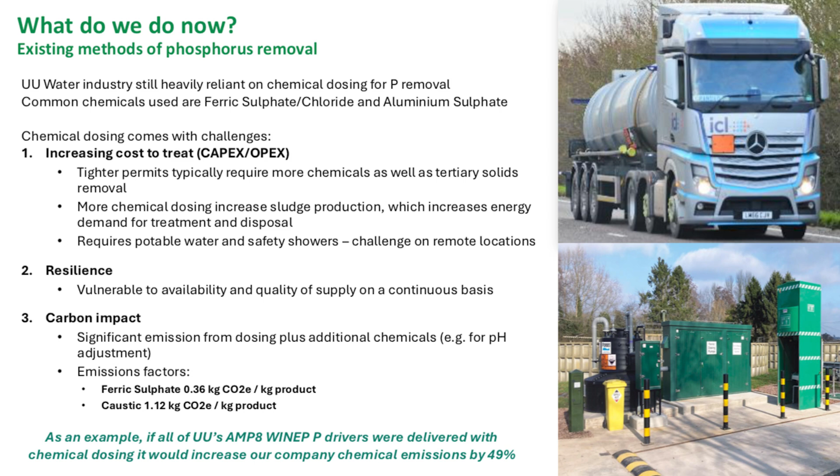As an example, if AMP8 WINEP drivers were all delivered using conventional chemical dosing, it would result in an emissions increase of 49%, so a very significant additional carbon impact just from doing the same thing and trying to scale it up, even if that was possible.

I've talked about rural sites and why they present a challenge, many and varied. In your company and your area of the UK, the challenges will be unique to you, but there are some common themes.

Smaller sites have a much higher cost per capita. The technology and the underlying safety investment and logistics are the same, whether it's a very large site or a very small site. So the overheads and cost of doing things become progressively more expensive the smaller the site you're at.

The operational complexity is a magnitude different to the complexity of the treatment processes already there. I've already mentioned that chemical supplies, electricity supplies, and the operational knowledge to operate some of these complex phosphate removal plants do not currently exist at some of these rural sites.

So increasing staff capability and increasing the critical mass of staff who have the understanding and skills to operate these kinds of plants is going to be a challenge for us, as well as delivering the assets themselves.

The supply chain and logistics I've already touched on. Longer transportation distances, up single track roads, in some cases without the capability to support HGVs, is going to be a challenge, particularly in some of those more remote rural areas. And the effect on communities, whether it's increased noise from deliveries and tankers moving in and out because of additional sludge being created, can be especially impactful in rural locations, including national parks and areas of outstanding natural beauty.

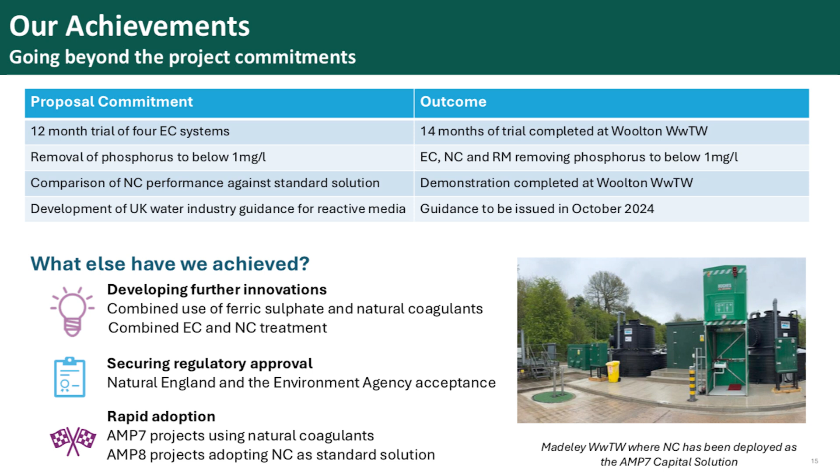That's meant we've been able to use it on a couple of AMP7 schemes already, and it is part of our solutions here at UU for AMP8. So it's really looking at scalability, starting to move what we've learned in the Alt P programme out into the wider business and using it. That's everything from me.

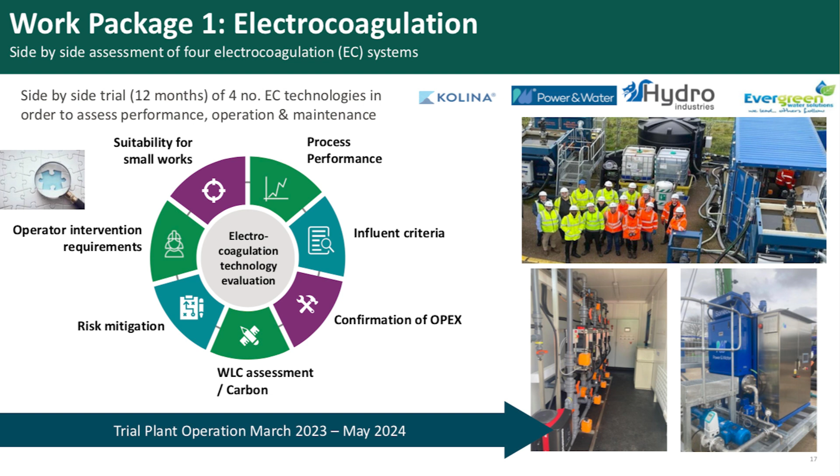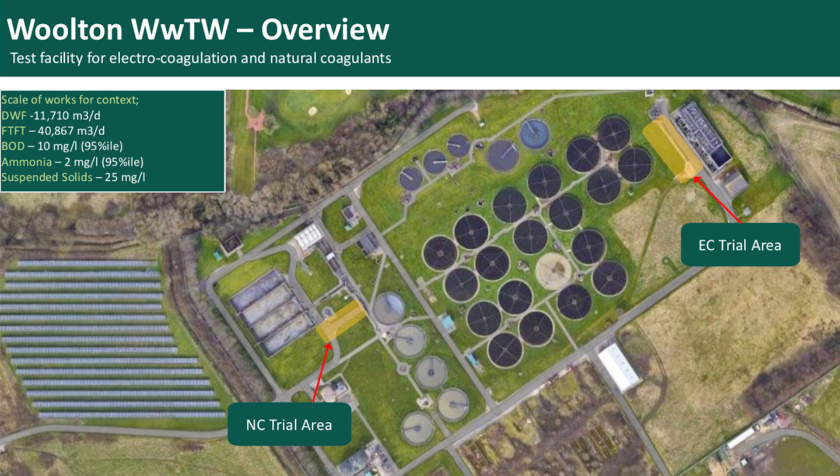So we trialled it down at Woolton Wastewater Treatment Works, one of our wastewater treatment sites based in Liverpool, so Liverpool South. It's a conventional trickling filter site. There's no existing P permit there, so no existing ferric dosing, which meant we had some P to try and remove. We actually hosted both of our work packages on the same site, so you can see the natural coagulant trial area and the electrocoagulation trial area are both depicted on this graph. Just some photos and a timeline.

So we actually started the design and procurement process back in May 22, so it's been quite a long piece of work in terms of a trial. You can see from left to right the progression of where we started to where we ended up. The digger on site was back in January 23 when we started turning the area of site into our semi-permanent trial area.

The photo in the top centre is what we ended up with. We started operating that back in April 23. In the trial area, we've got 4 electrocoagulation suppliers and a ferric control lane as well.

We opted to go for a settlement lamella downstream of every single lane. It's not necessarily the conventional approach we would take, but it normalised everything for us so that everybody had the exact same approach to settlement. We can talk a bit around some of the limitations associated with that and why the results might look the way they do. We ran that all the way through to May this year, when we finished on site - so quite a long trial period, around 14 months.

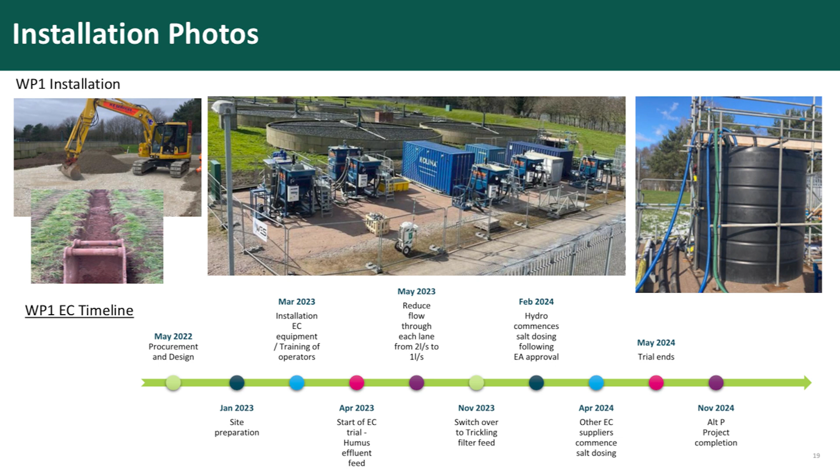We tested a number of different feed sources. We started with humus tank effluent on the advice of our EC suppliers, that being the cleanest, the least fouled, so potentially the most efficient in terms of power consumption. Then we gradually moved it further upstream, so we ended up going for direct lift to the trickling filters, then humus tank feed. We also did an experiment where we artificially raised the conductivity by doing some salt dosing, and I can talk about the impact that had on overall efficiency as we go through the graphs.

There are a lot of graphs, I should warn you now - a lot of graphs, a lot of data, and I'm going to have to go through this pretty quickly. The next one looks a bit messy, so I'll do my best.

This is our instrument data coming off the back of every single lane. We had Phosphax instrumentation on the back of each of our 4 EC lanes and our control lane. I'm not going to go through all of this data point by point, but I think it tells a story.

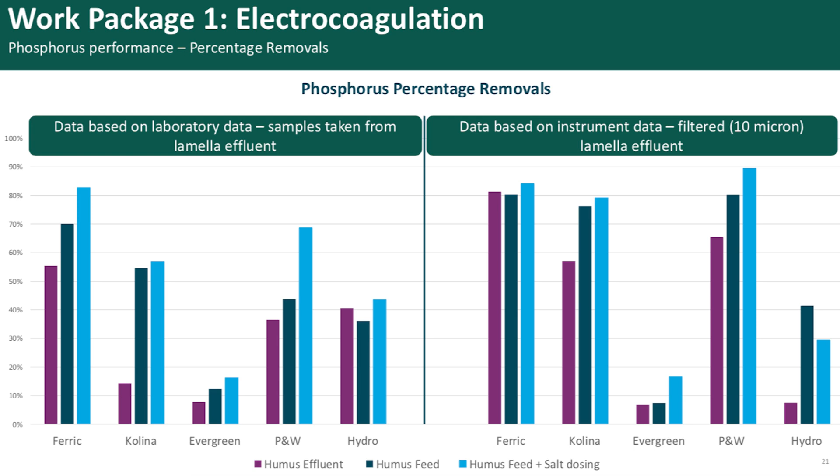That was consistent with some of the solids performance data that we saw as well. For some reason, the solids didn't seem to settle as well in the electrocoagulation lane as they did in our ferric dose lane. I'm not sure if it's just down to the floc formation or whether there's something to do with it.

So you get hydrogen gas generation, which I'll come on to later in the slides, whether the hydrogen gas generation has something to do with floating smaller solids rather than allowing them to settle. But there was definitely something in the solids which we managed to take out by the instrument data, and it levelled it out in terms of performance for a few of the lanes.

So we had the power and water lane, which was very good at P removal, but we also had a bit of a risk in terms of iron residual. It should be said as well that even the ferric lane was fairly high in terms of what we would normally expect, and I think coming back to the lamella selection, that probably played some impact in that.

But I guess the key thing is it's not as straightforward as perhaps plugging it in, getting P removal, and everything's hunky-dory. There's lots of things to consider, and the iron residual is definitely a risk that needs to be taken into account when selecting the technology, and there is a range between the suppliers as well.

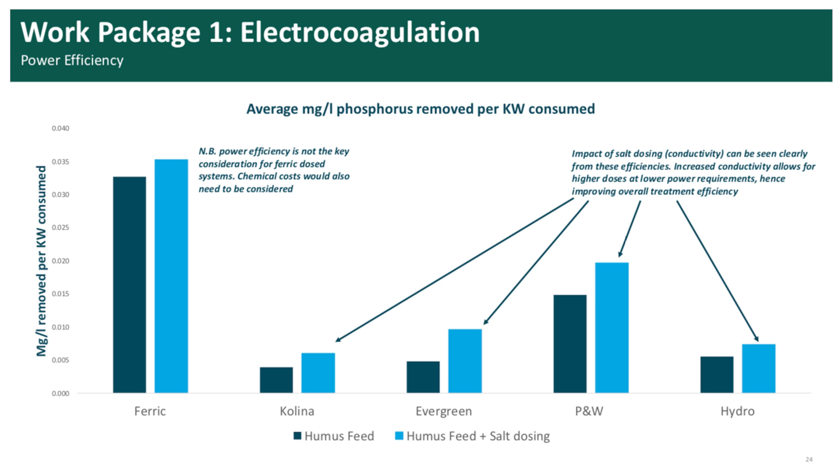So what else have we learned, and what are the potential barriers? One thing that I have mentioned, but without going into too much detail, is we did actually have quite a lengthy shutdown on some of the systems after we had a hydrogen gas detection on one of the rigs.

So we had one of the rigs which was in a shipping container with an open top tank, and I mentioned before, as a byproduct of electrocoagulation, you do get hydrogen gas generation. One of our process scientists who was working in there got gas alarmed one day, and we took the decision to shut the trial down for a short period of time where we did a full investigation.

Subsequently, we ended up fitting fixed hydrogen monitors with some kind of auto shutdown levels installed on each of the lanes. We did eventually manage to start back up after we'd gone through all the DSEAR requirements, but something for everybody to bear in mind who is looking at electrocoagulation - and I know that a lot of water companies are putting it in - is that you do need to do a full DSEAR risk assessment before you put these things into operation.

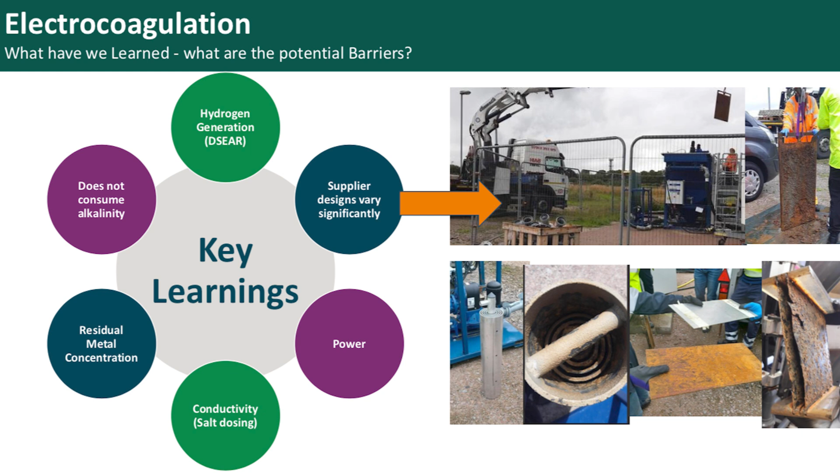One thing which is a real key benefit is the fact that these things don't consume alkalinity. On a lot of sites where you often dose ferric sulfate, it consumes alkalinity, which means you might need to put supplementary caustic correction in place. You don't need to do that with electrocoagulation, which is a real key benefit, both from OPEX, CAPEX, and health and safety.

So this is just a summary, summarising some potential benefits, potential risks, and some next steps. So yes, EC offers chemical-free P removal, doesn't consume alkalinity. They do have quite a small footprint, and they can be installed with a modular approach. There's no requirement for any chemical delivery area either.

On the flip side, there's quite a few risks that we probably still need to overcome. The high metal residual is something which can't be ignored and needs to be taken account for. We think you would definitely need some kind of downstream protection to manage that risk where you would consider EC. Power requirements vary, so you need to make sure you get ample power supply on site.

There's a passivation impact - passivation is just the name for fouling of the plates in electrocoagulation. What you tend to see is that when that passivation layer starts to build up, it increases the resistance, which means your voltage starts to go up. That essentially drives when you need to replace your plates. We saw on some systems where the passivation happened within a couple of days. We kind of got to a point on some systems where it was a bit more consistent, but that's a real key consideration.

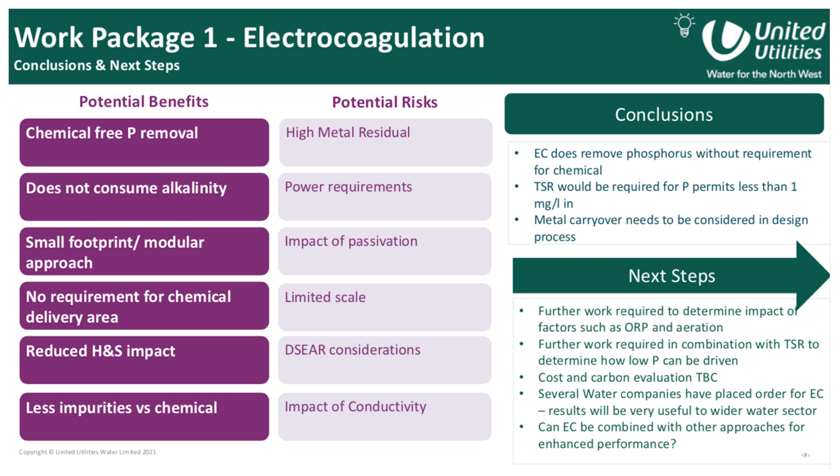I think we're still evaluating our cost and carbon, which Rowan's helping us with. In terms of outputs, we know that lots of other water companies are placing orders, and they've all been to site to come and have a look at the kit and ask us lots of questions.

So from a knowledge sharing perspective across the sector, we've done that really well, especially with companies that are putting it in. The other thing, which Richard mentioned, is the potential to combine it with some of the other approaches we've explored, particularly the natural coagulants. I think you'll find some of those combinations quite interesting as we move through.

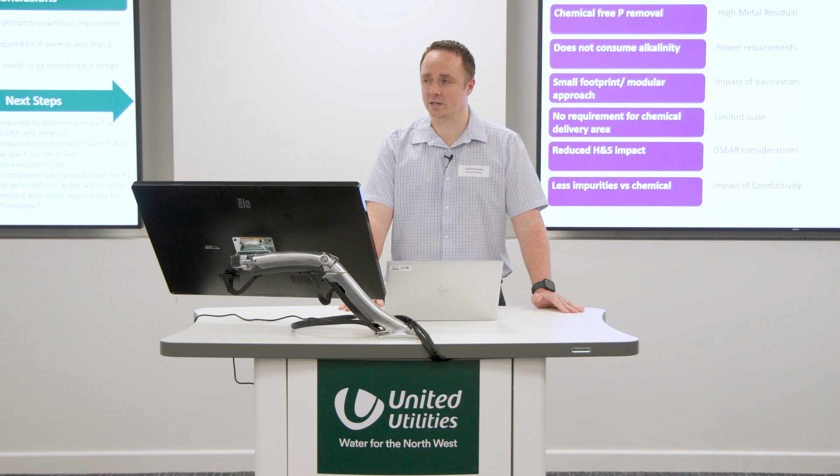Good morning everyone, I'm Kieran Brocklebank. I have the privilege of being the Head of Innovation here at United Utilities, and I've been involved from day minus 473 on the ALT-P project.

I must admit, when Mark Garth stood up earlier and introduced this whole section, saying he'd been thinking about ALT-P and wanted to reflect on his career, I was thinking, God, was it really that bad? He's going to hand his notice in or something. So I'm very pleased that you made that connection for us, Mark, because making those connections is a really important part of innovation.

It's why we're all here today. It's no good a single water company operating on their own, in silo, working with a single supplier. Let's get diverse voices, let's get out there, let's get AMP8 to be a much more collaborative environment.

What I wanted to do was spend a few minutes telling you a little bit about how United Utilities goes about innovation, then make that connection to leveraged funding and the Ofwat fund, and share with you what it's been like as a water company, a client, using the Ofwat Innovation Fund. What's it been like as a lead partner on this project, and maybe take us away from just the technical aspects of ALT-P, elevate us a little, and see what's the big learning we can take from here and apply to lots of other places. I'd like to share that learning with you in a very open and transparent way.

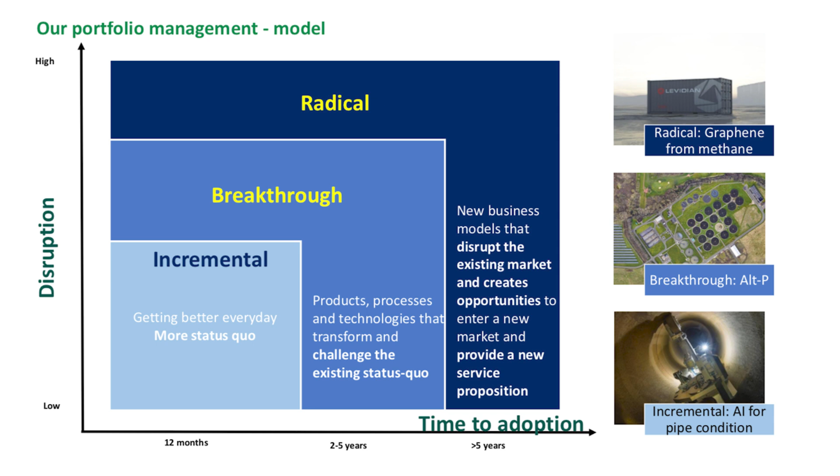Finally, as an example of radical nature—we've publicised this quite a lot through LinkedIn, at conferences, and in other publications and press notices. We've got something really, really different: can we convert biogas into graphene and into hydrogen? If we do that, we're going to create these alternative materials. What are we going to do with them? Who should take them from us? Who should give us some revenue? Who should help us dispose of them properly, in a safe and compliant way?

So we've got this model about how we categorise all this investment, and the Ofwat Fund is no different. We're looking for breakthrough and radical ideas that we can really drive home in this risk-based approach.

But I can tell you, on other days of the week, there is innovation activity going on in every pocket of United Utilities—north, south, east, west, in water, waste, in customer, in every department. You can lift a rock and see people innovating every day. I think that's fantastic—it's just what we do around here.

It's what our leadership expects of employees, and we incentivise that, reward and recognise great innovation behaviour. It's hardwired into our values. But of course, not everyone every day is dealing with breakthrough ideas or super radical ideas.

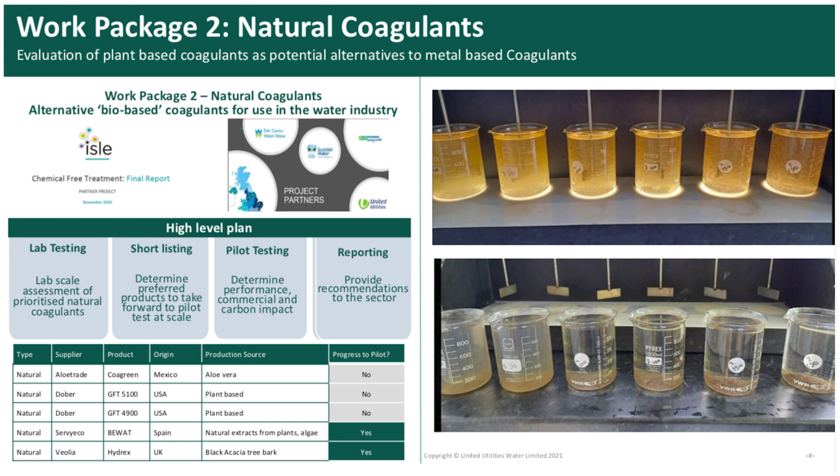Initially, we were looking at whether we could dose the natural coagulants on their own to remove phosphorus. What we found was that they were very good at solids removal, but they didn't do much for the P. We took that learning and thought there might be something in it with the solids, so we started to combine it with ferric, but at reduced amounts, to see if there was a synergistic effect. When we did that, the results were really excellent.

There was massive floc formation, really fast settlement, and we also managed to reduce the amount of ferric sulfate required by about 50%. One of the other interesting things we found was that the supernatant in the jar tests - the iron residual - was very low compared to when we dosed ferric on its own.

So we took all of that work in the lab and decided there was merit in taking that combined approach to a pilot scale.

We did this down at Woolton as well, the same site as the electrocoagulation trial. We did the jar testing back in summer 2022, and we actually completed this package of work in November 2024. There were 2 products that we tested in the lab which we took forward to pilot scale testing.

We've got both suppliers in the room today. We tested Hydrex, supplied by Veolia, and we also tested the BEWAT, supplied by Aircon Water, produced by a company in Spain called Servyeco.

The pilot plant itself took screened crude as our feed source, and we ran that through a pipe flocculator to promote mixing with a number of injection points, and we had a settlement lamella to replicate a settlement stage. Similar to Work Package 1, we had a control lane and an experimental lane.

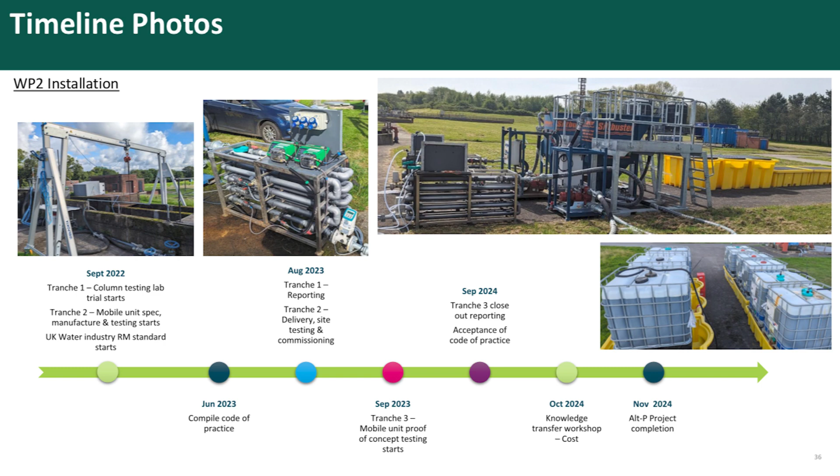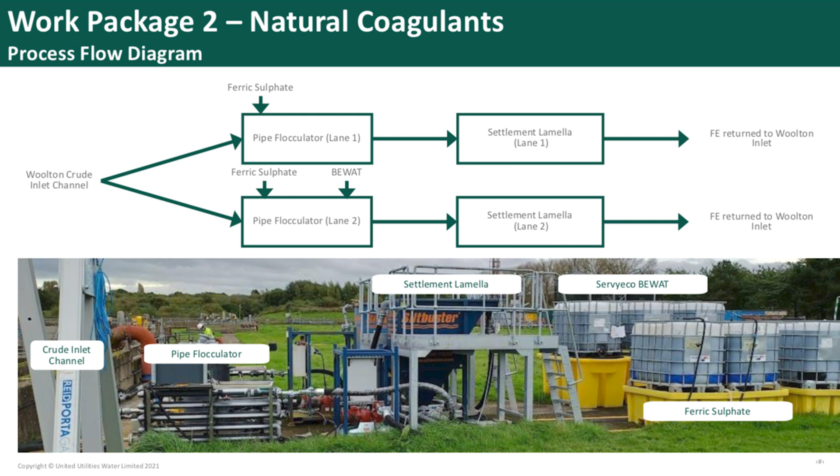This one's showing some impact on phosphorus performance, and it's probably worth noting that this wasn't a how-low-can-you-go trial with regards to phosphorus. It was, can we get the same result with regards to phosphorus performance with less ferric? The settlement lamellas and the control were probably less than ideal, so the results should be taken in the context of the pilot equipment and the quite basic control that we had available. But the merit of the control is that we can see how the experimental then compared.

On the left-hand side, in the green heading, was the BEWAT performance. This is where we had the control at 4 molar ratio, and the experimental at 2 molar ratio supplemented by 100 ppm.

And in both graphs, the feed is the dark blue colour, the control lane, which is just ferric, is the orange, and the experimental lane is the pink.

So moving from left to right with the data points, we can see when we started off, the experimental lane was outperforming the control lane considerably. Then as we moved towards the middle, the performance started to tail off, and the control lane did start to outperform the experimental lane to some degree.

We weren't getting really low levels of P in either lane, but I think we can put that down to the lack of control that we had. It was quite basic. But there wasn't that much difference in it.

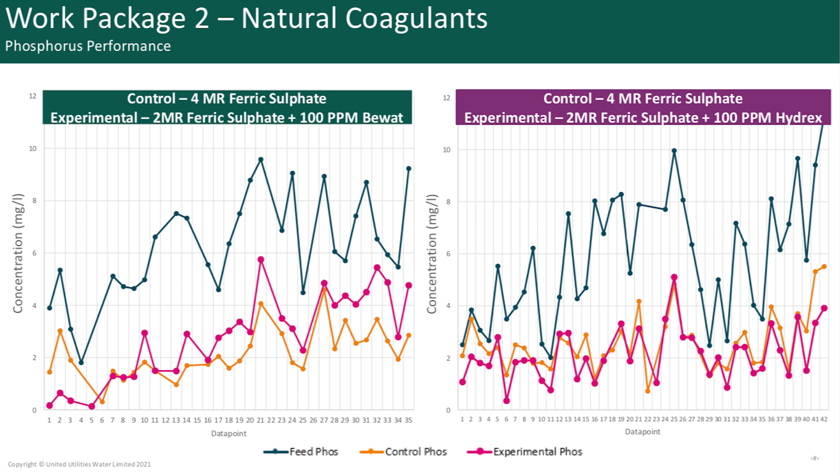Similarly with the Hydrex, again that was a 4 molar ratio in the control lane. Experimental was 2 molar ratio plus 100 ppm. And what you'll see in the Hydrex experiment is that it was pretty much neck and neck throughout the duration for both the control lane and the experimental lane. So that's with 50% reduction in ferric sulfate.

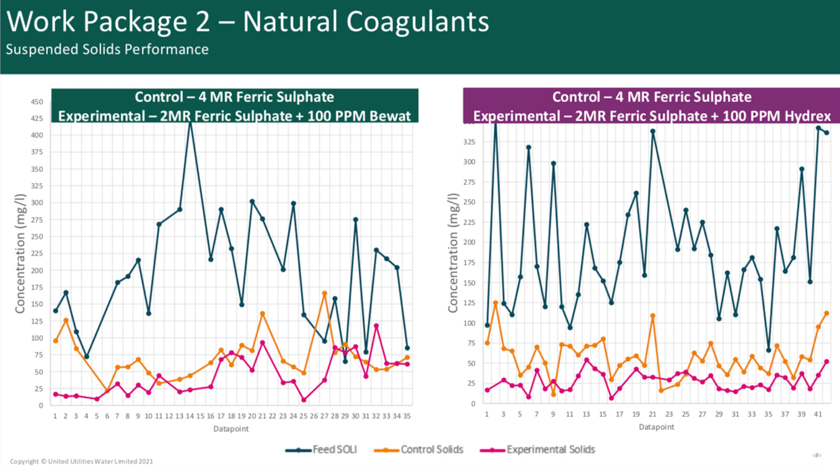In terms of suspended solids, this is when we started to see outperformance in the experimental lane, and this is where the natural coagulants really start to come into their own. You'll see in both graphs, the impact of the BEWAT on the left, the impact of the Hydrex on the right. The suspended solids performance was significantly better in both lanes. Some of the levels that we were getting down to with a crude feed were less than 25 milligrams per litre suspended solids coming off the back of the lamellas.

And then the other thing, which is probably the key learning from this piece of work, was their impact on the iron and the iron residual.

So the feed iron that you can see in both graphs is the blue line, which is really close to zero, not much coming in. The orange line is what was coming out of the ferric dose lane, so some quite high levels of iron coming out in terms of the residual.

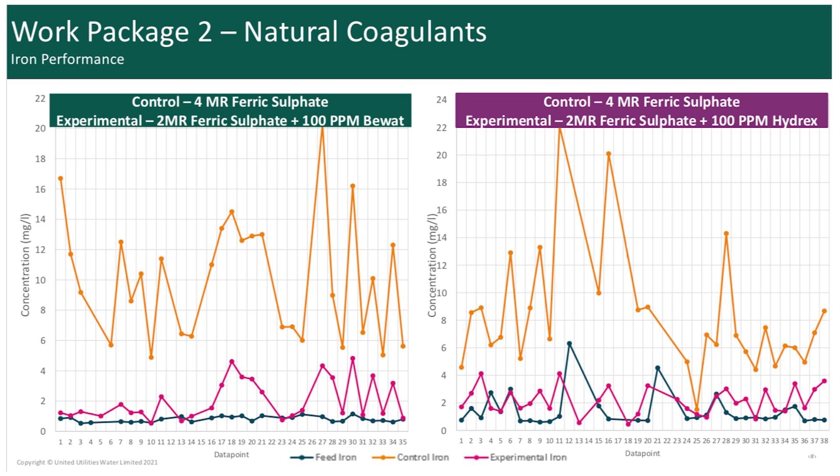Now what you can see with the pink line is the impact of the addition of the natural coagulant. It pulls that iron residual down to consistently less than 4 milligrams per litre. So we're iron compliant at a primary dose location by using the addition of natural coagulant, and that was with a reduced amount of ferric sulfate as well.

So we've got a summary of some percentage removals here, which I'm not going to read every single percentage removal line by line, but I've just highlighted the ones where the experimental lane outperformed the control lane. The green is the BEWAT, the purple is the Hydrex.

Not focusing too much on the actual numbers, but what you'll notice is that a lot of the outperformance was actually on the experimental lane. So whether that was BOD, solids, alkalinity, generally the experimental lane did outperform it. In both cases, the P was pretty close.

But overall, the other benefits, and particularly the iron and the solids, is where we saw a real benefit.

So we took that learning, and the learning from work package 1, and we decided there might be an opportunity to combine the two approaches. If you remember before lunch, when I was talking about electrocoagulation, one of the barriers with electrocoagulation was the high iron residual.

Work package 2, one of the key selling points was the impact on bringing that iron residual down. So we decided there might be a real opportunity to combine the two approaches and see whether you could get the best out of both of them when we combined them.

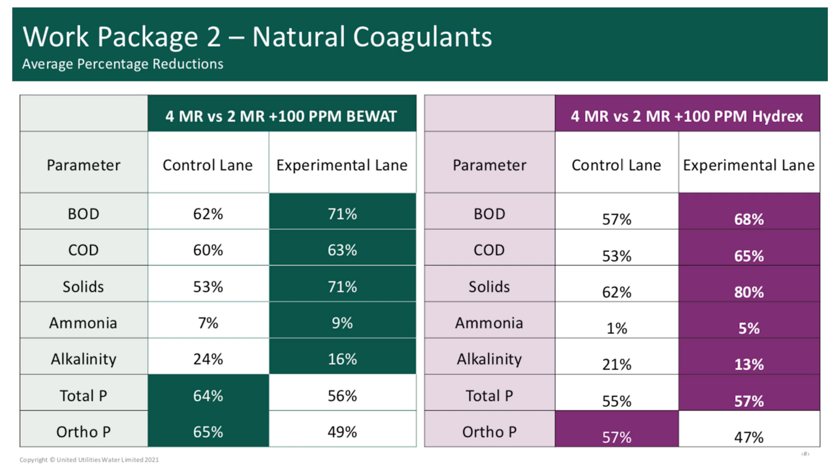So we actually dosed some natural coagulant into the power and water lane for about a week at the end of our trial, a very short trial, but the power and water mixed tank was an open mixed tank, so it made it quite easy to do that. And we saw some really promising results.

So when we started to add the natural coagulant, we managed to get some samples which were less than 0.5 milligram per litre coming out. I think some of them were pushing 0.25. But yeah, we saw a real step change in terms of the P performance compared to what we saw before with the EC.

Again, with the suspended solids, as soon as we added the natural coagulant, we were getting down to less than 5 milligrams per litre in suspended solids.

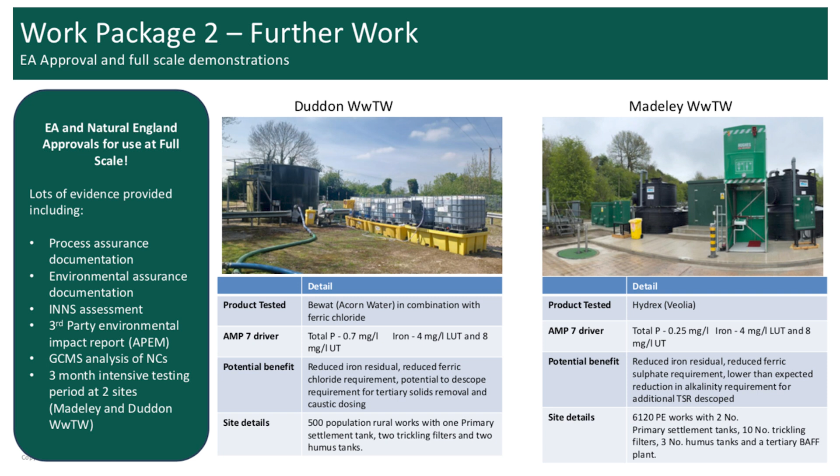So we've done some trials at Duddon and Madeley, and these are both AMP7 schemes. Duddon is getting a 0.7 P driver, Madeley getting a 0.25 P driver. For both schemes, there was a TSR in scope. Duddon's around 500 population, Madeley's around 6,000 population. For both sites, the approach we've taken is combining ferric sulfate with natural coagulant at the primary point of application, dosing into a primary settlement tank. And we've got some results and graphs to show you on the next page.

At Duddon, we've managed to get the total P to around 0.28 on average against a 0.7. The iron residual we've managed to get to 1.12 on average. The key selling point for both Duddon and Madeley: Madeley 0.15 milligram per litre average against a 0.25, iron average 0.23 and a 0.5 95th percentile. For both schemes, we've done that without the requirement for a TSR. So we're managing to de-scope the requirement for TSR from the capital solution, and this is going to go in as the capital solution for both these AMP7 schemes.

The graph that you can see just shows some of the results for iron and P. On the Duddon chart, the iron residual is the orange line, the phosphorus residual is the blue line, and the dotted lines are various combinations of molar ratios and natural coagulant dose rates that we tried on site. You'll see that consistently when we added the natural coagulant, particularly after the third dotted line in, the iron really came under control and the P was really, really good. We did have one exceedance on the iron, worth pointing out, which was down to a blockage on site that caused some short-circuiting of the process.

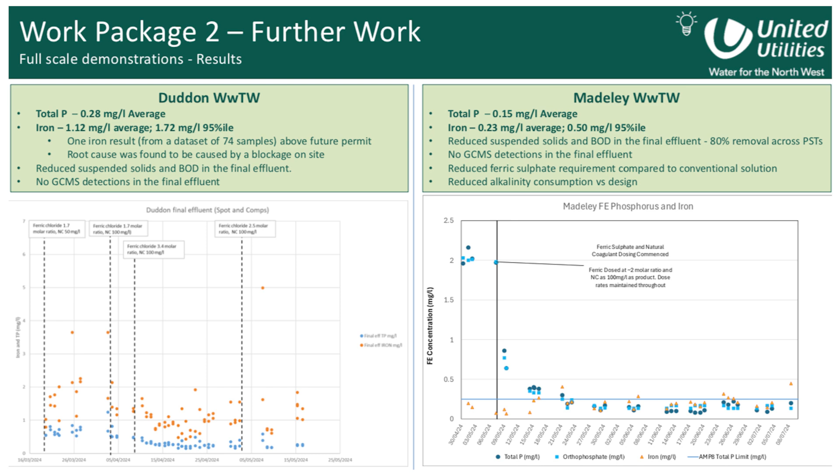Similarly for Madeley, we've just been dosing into the primary tank, and we've managed to get the effluent quality down to 0.15 milligram per litre. Managed to de-scope the requirement for TSR on that site. And what we've also managed to de-scope is the requirement for alkalinity correction, because the natural coagulant doesn't consume alkalinity at the same rate as ferric sulfate does. I think at Madeley that's with a 2 molar ratio supplemented by 100 ppm of natural coagulant.

So really, really good story, really positive outcome from the project where we've taken the learning, applied it on site, and it's actually going in as 2 capital solutions in AMP7. And we're now looking to roll it out as an approach in AMP8 as well.

We see some benefit to reduce load on downstream assets because the BOD's solids performance is so good. Could you free up headroom on downstream trickling filters, ASPs? It does still require ferric, so it does still require a combination. So when we were talking about chemical deliveries previously, that's not necessarily got rid of that, but there is a place for it, we believe. And we're still working on the overall carbon impact, but we believe there's a reduction in operational carbon.

In terms of risks, I've highlighted the regulatory approvals that are required, so we've done a lot of the legwork for that, but it's just kind of a word of caution to anybody that does want to use these products. You do need to inform the regulator that you're planning to do so with a robust plan and an approach to it. From a unit cost perspective, they are more expensive than ferric sulfate or metal-based coagulants, so you do need to do an overall costing exercise to determine whether there's benefit there.

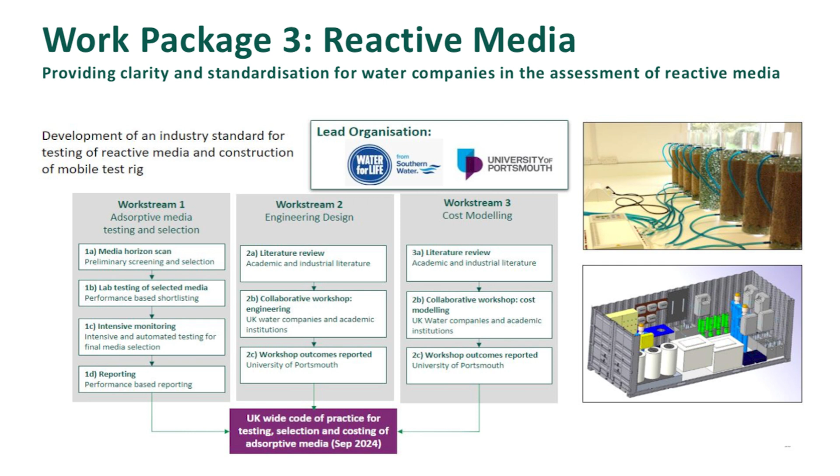I'll go through some of the things that involve lab testing, but one of the important things as well, we've been trying to establish a mobile test rig which could move between different sites with different water chemistries, different phosphorus concentrations, to try and standardize an approach to field testing as well as lab testing.

Unfortunately for phosphorus trials, this works has ferric dosing, so the trials we're going to report on at the works here, not the ones in the field, we have to dose phosphate back in. So it's a bit of the only downside of having that site.

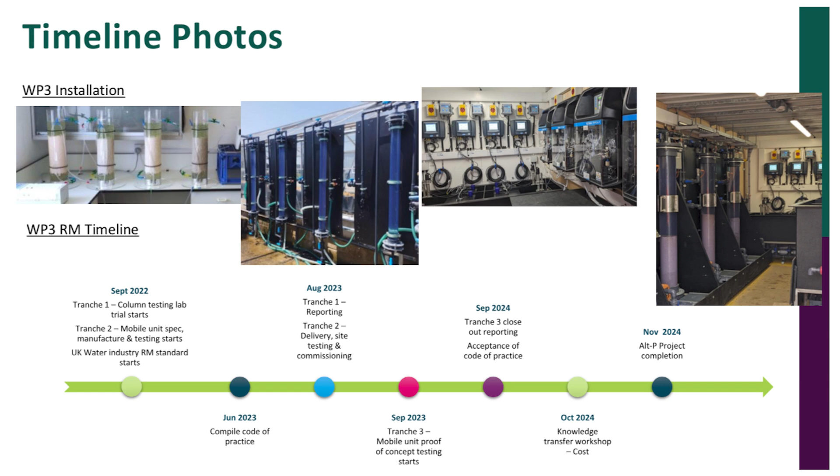Coming through, we've set up various trials - column trials, indoors and outdoors on site - and reported on that. We are developing this containerized system. We saw on the first slide the ALT-P open day we had, where we hosted visitors and showed people around that containerized site. That container is placed at another sewage works nearby, a small rural site, West Marden, for various reasons, also because there's ferric dosing at our main site. So we wanted something which was more real-world conditions.

So if we start off with the column trials - first of all, we did a horizon scan. We listed maybe 25 different media which were out there, and we went out to the water industry partners in this project and asked people to rank them and come up with the media which they thought were most interesting or most appropriate. We decided not to test any of the media like the Polonite, which has been used in practice. We wanted to look at what media were there which were new, which might offer new possibilities.

We decided we had two types of trial. One was going to be our low-rate indoor column trials, and secondly we had outdoor columns with high-rate media, which were going to be pumped and operated at much shorter hydraulic residence times. Throughout this, when I refer to empty bed contact time - you can report the results of reactive media in a variety of ways, in terms of mass removed per mass of media, mass removed per surface area of media. We've decided these are going to be in a unit process, so we deal with volume of material, and express it as empty bed contact time.

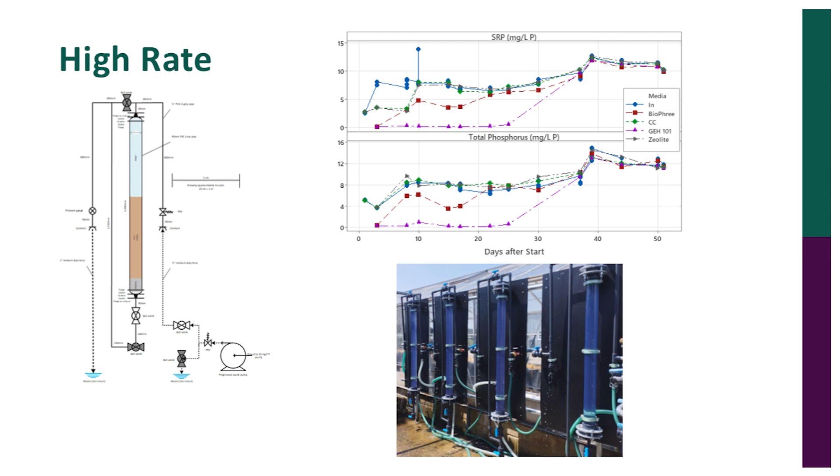We've got some quite reasonable results for the GEH 101. That media was keeping the phosphorus down to less than about 0.1 milligrams per litre over about 25 days. But with the problems we had controlling the flows on here, I wouldn't want to bet on the mass balance of this. This was causing us all sorts of problems.

Luckily, we had our engineering design workshop. We had 15 representatives of 8 water utilities, and everyone said, no, we wouldn't use reactive media in this mode. So we parked the high rate media at that point because people said that wasn't going to be an application.

The low rate media in the columns in the lab, we set up these columns. They are 600 mil high, 130 mil diameter. That gave us, for the media we were testing, over 20 times column diameter to media diameter. There's some debate about what that ratio should be, but 20 plus seems to be a level which doesn't give you too much wall effect.

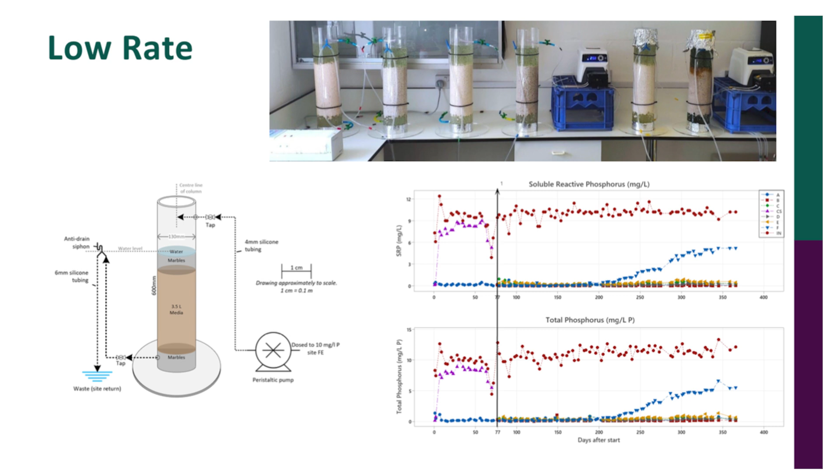Now, a couple of things of interest. First of all, the Phosgrain was performing the best, but it still gave an issue with pH elevation. We have pH above 9 there over the first 200 days. We're still getting good removals after 200 days, but it would need some sort of pH amendment, as with the existing media being used in practice.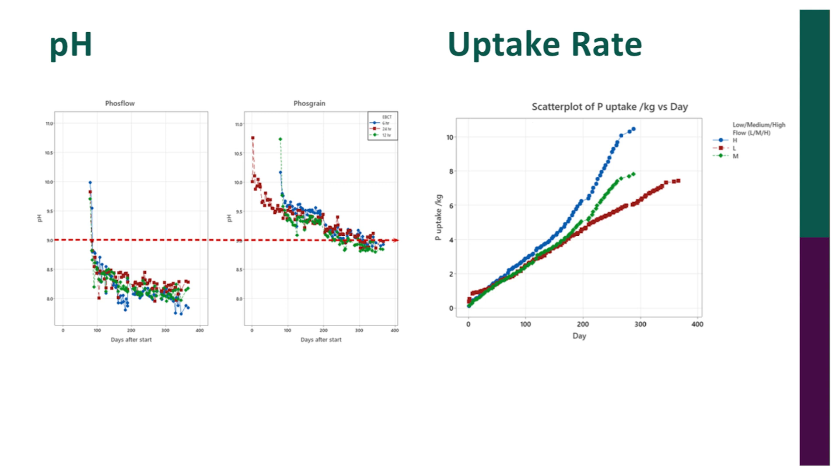But if you've got a very low solids effluent, the Phosflow media could be used directly. The Phosgrain, we're getting very good phosphorus uptake capacities in terms of grams per kilogram, milligram per gram. We've carried this on, and the Phosgrain's gone up to over 20 milligrams per gram. This is much, much higher, almost an order of magnitude higher than what we've detected on some of the other commercially available media. So this means the beds could be sized smaller. There's a real trade-off here between size of bed, pre-treatment, post-treatment, and the economics.

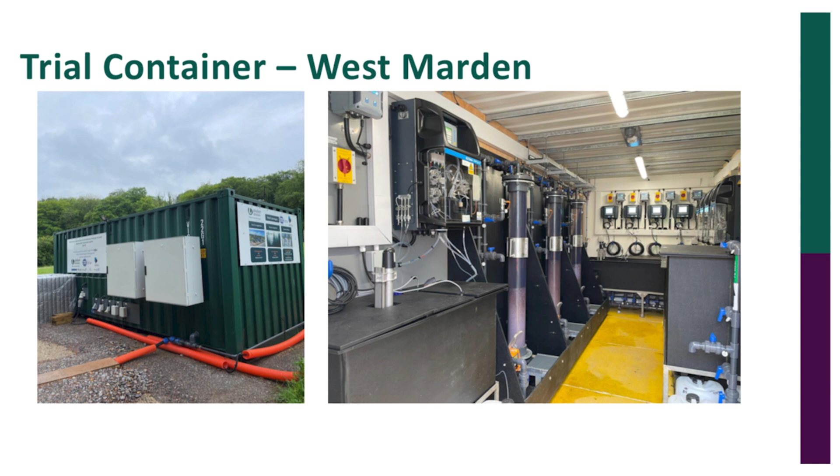Here's the trial unit. We've got 3 large columns, and in here we've got the Phosgrain and the Phosflow stroke Poseidon pellets. We put some cockle shells in. I did some more work with some MSc students, and we changed the calcination temperatures and pre-treatments and thought we'd cracked it. And then we put a column of cockles in here, and again, they haven't done anything. It's really disappointing. Really want the seafood to work.

We've replaced that with another media. We will report on that subsequently when that's installed. And we also have an intermediate scale filter here, which we filled with Poseidon pellets. This is receiving final effluent from the works. All of the influent and effluent are being monitored for turbidity, pH, phosphax units doing total P and SRP, and these are being online monitored.

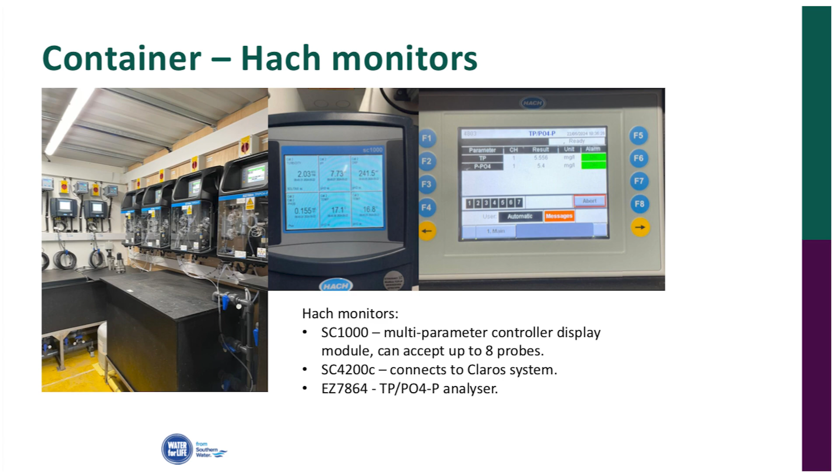Here you can see some of the instrumentation. Unfortunately, this has been an absolute nightmare to maintain. We imagined we'd pop along once a week, top up the reagents, do a bit of maintenance or whatever, but we've had people down there nearly every day with different alarms going off, so it's been quite an intense experience. Adela and Janine, the research fellow working for us on this, have been spending inordinate amounts of time giving tender loving care to this containerized system.

So the idea of it being moved around between different sites is a challenge. I don't know if we're quite there yet with the technology and the monitoring and the online instrumentation for this level of sophistication. We have got all the bells and whistles. We can check - I'm not going to do a live demonstration because it probably won't work, but you can see we're getting feedback from all of these different columns. We've had lots of interruptions on this data. We need to go through and just block out when we had failures and what we were monitoring. So I haven't got anything to absolutely report on that today.

But we are getting good removals from the two media, pretty similar to what we were seeing in the lab.

So those two media do offer a new perspective, a new set of options for the water industry. Now, commercially, Water Warriors are bringing this over to the UK. I know they're speaking to some water companies. We bought the last bulk sack of them in the UK and they charged us an arm and a leg, but I'm sure if there's a bulk supplier, commercial supply, they'll bring their price down.

And the Phosgrain is made bespoke by the Danish Technology Institute. So again, I think there's a commercial aspect - people have to speak to them and work out what the production cost and what the bulk cost is, because the cost we paid probably doesn't translate.

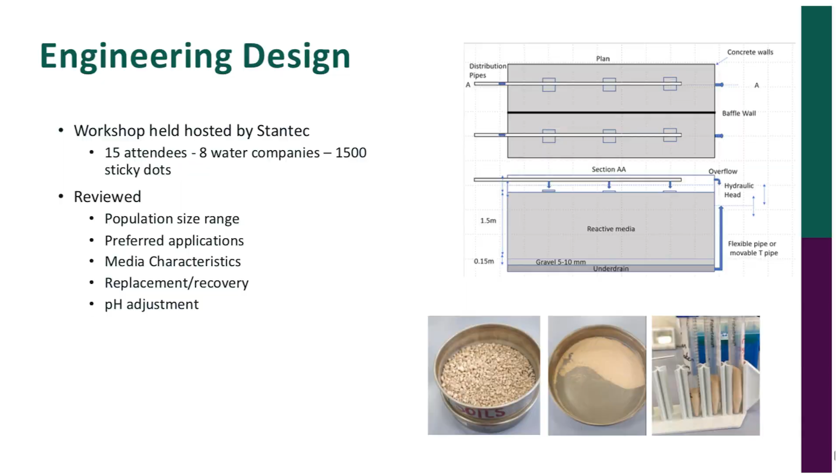In terms of engineering design, I said we had the workshop hosted by Stantec. We've defined some population sizes. Generally, we're looking at a sort of filter-based approach, and we've got various media characteristics and general layouts which we've come up with. We're also looking at potential for recovery. We've been doing some experiments around how we might recover P. That was beyond the scope of what we were doing with ALT-P. Obviously, if we can get that circular economy aspect of recovering the P and getting it back to agricultural land.

That's why the cockle shells excite me a lot, because obviously they're used as a soil amendment anyway. If you've got P on them, it could be a direct use without an intermediate stage of either physical or chemical recovery or rejuvenation. Cost modelling, again, that's been quite a learning curve.

Unfortunately, we started this project with staff in the School of Civil Engineering and Surveying. We had a quantity surveyor who'd previously worked for Thames Water, had water industry experience. We thought, great. Of course, this project took, from the day it was announced we'd won it to when everything was signed off, a year, and at that point he decided he could earn lots more money outside the university, so he left. We've been going through this with a QS who isn't a water industry specialist.

We're starting to understand some of the variables around sizing, cost of media and replacing media, and comparing that to some of the reported figures in the water industry spending plans, and trying to understand how these fit within the externalities, because of course capital costs aren't just putting in a tank and a pump. There's all the other things you've been hearing about, the health and safety aspects, the knock-on effects on sludge and other aspects of pH amendment throughout the works.

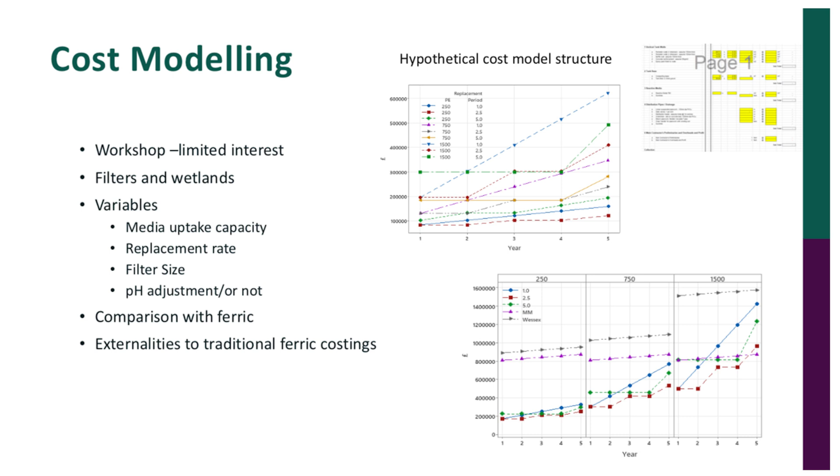So we have got a media now which is available, which performs well, and does not require pH adjustment. Cost is going to be the deciding factor, and that's all about the economics, which I hate to say it, I'm not an expert on, and after dipping our toe in the water, I don't think I want to be an expert in, because it's not simple.

Of course, there's the effluent solids management, what you're feeding onto this. If we start to go down to these media, 2 to 6 mil, we are going to have to think about the solids management going onto there. Do we have a sacrificial reed bed? What do we put up front? And the replacement period and phosphorus recovery - that's to make this the technology we would hope it could be in terms of stopping phosphogeddon and all this running out of fertiliser. We need further research in that area.

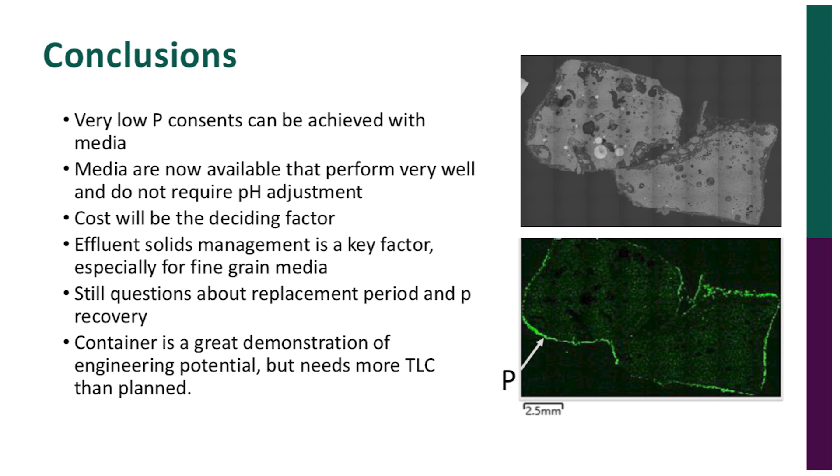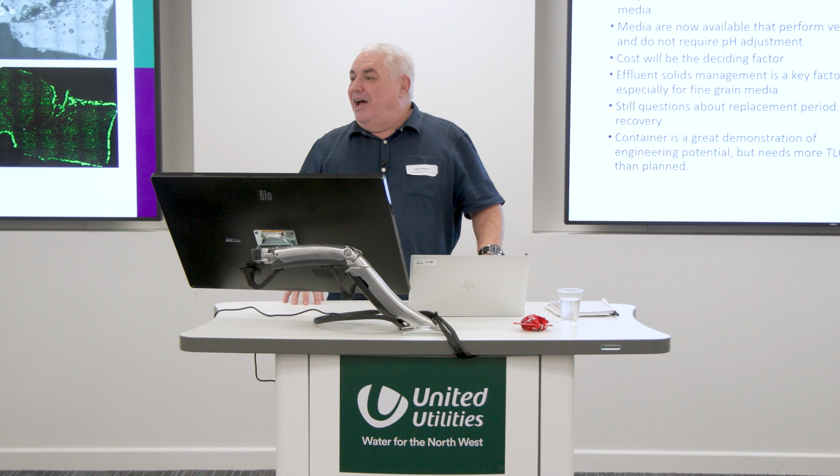The container, I think we did a great demonstration of the engineering potential, but there needs to be probably some more robustness in the equipment before that could be deployed at scale. But we are starting now to get some really good results out of that, and we're going to keep running that to the end of the project to get as long a data set as we can, and that will be reported in the final report.